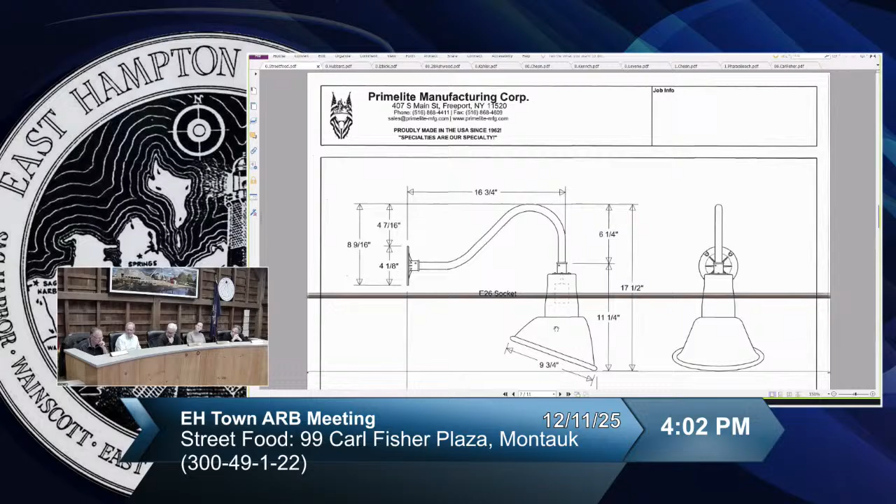She had a drawing. So that's the facade. Those are the gooseneck lights, shown upside down, but you get the idea. They're dark sky compliant, and they will go right over the sign, which is right over the central door.

Any discussion from the board? Can you show the photo again? So what's installed there is not what we're... No, these are new lights. Those are like little tiny spotlights. They sit outside in the summer. But this is actually to light the Street Food sign itself. Yeah, okay.

Good, no, I think it's good. And the others remain? And the others remain, yeah. Okay, I'd like to make a motion to approve this application as presented. May I have a second? Second. All in favor? Aye. Unanimously passed.

Moving on to change to commercial. This is Naturally Good, Suffolk County Tax Map number 300-49-4-12, at 38 South Etna Avenue in Montauk. This is not the Naturally Good store and restaurant on Main Street. This is the original Naturally Good property, which is on South Etna, closer to the waterfront in downtown Montauk.

The area in question here is a second floor. We're being asked to approve work that's already been done to change, as you can see, the lines in the stucco there. That was originally a covered porch, and they've enclosed it and added windows to 3 sides of the end of the second floor. It's barely visible, as you can see, behind the vegetation, and you're sort of peeping through, but there you can see the gable end view and a little bit of the other side facing the neighbor.

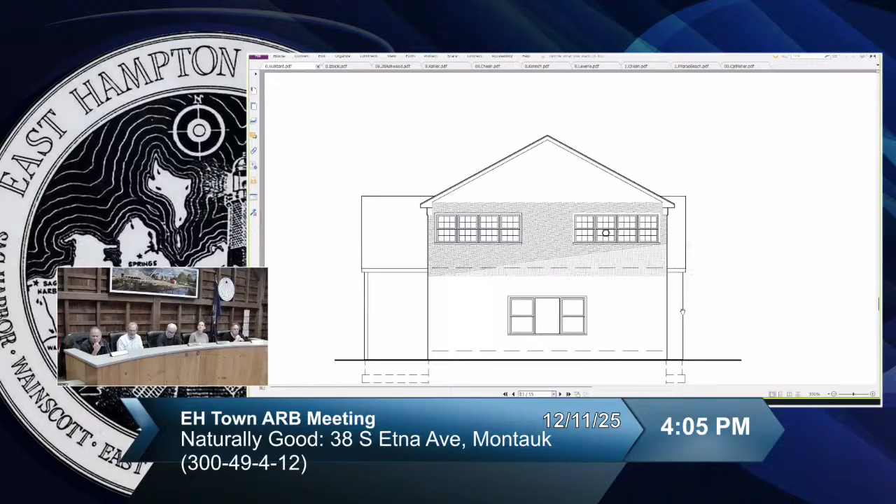But yes, I think this was done years and years ago. I looked at the original plans. We found them. This was a Tom Missing, I believe, or Frank Hollenbeck plan from the 90s. I think it always had planning board approval, or it was on the planning board's final approval, I think in November of this month. So they were just kind of going through and cleaning up all the things, and this arose. But the birds in the picture are not part of the application.

They just happen to like it there. And this is, I think it's a sushi store on the first floor now.

The hatch on the drawings is just indicating the area of work. I didn't see that there was any issue, because the stucco matches what was already there.

I don't think it was ever like a screen porch as you'd think. It was the second floor. I don't even remember it being different. I don't remember it being anything other than what it is right now. And I do know the chicken teriyaki is the only one my kids love from the downstairs place, although the street food's good too.

It's a little different than the plans because those are 6/6 windows and we have 1/1 windows now. So do we need to recognize this as built? Chris, we should mention that.

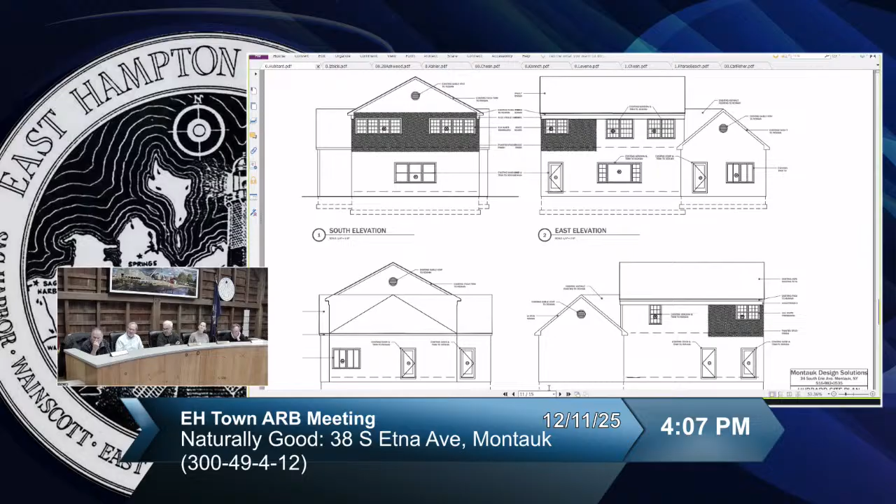Can we go back to the photos of the existing? Because I think the existing other windows, besides these ones and the other photos you can see in the overview, I don't think any of the windows have divided lights.

That was probably plastic grids that snapped in. Yeah, they just snap-in grills that were used, and they're taken out. So we're looking to approve a 1/1 light pattern.

As an as-built condition. Comments? Frank? No objection. Peter? I think we're good.

I'd like to make a motion to approve this application as presented. May I have a second? Second. All in favor? Aye. Passes unanimously. Thanks, Sandy.

Third item of the evening, still under change to commercial. This is Driftwood Apartments, Units 62 and 63, Suffolk County Tax Map number 300-110-1-13, at 2178 Montauk Highway in Amagansett. Chris, this is also yours.

This is a property in Napeague, just before you get to Hither Hills State Park, overlooking the dunes. It sort of makes you think of stopping at Howard Johnson's for a drink on your way out on the weekend. It's that kind of era.

This property is beautifully maintained, but it looks like people are starting to take single units—and in this case want to take 2 single units and combine them. Under each gable in this photo, you see that's basically 2 units, so each door represents 1 unit.

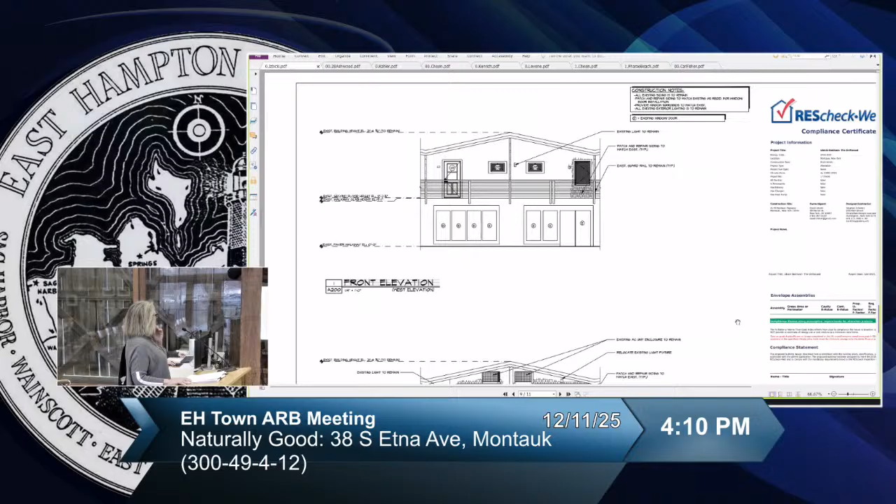There we go. So that's the change to the window, taking the door out. And on the other side you've got the sliders. Those are existing HVAC units up above, encased with a kind of lattice work.

I believe there was a different elevation that showed the lights moved as well. No new lighting—they're moving one existing light. One stays where it is, and the other existing light is being moved.

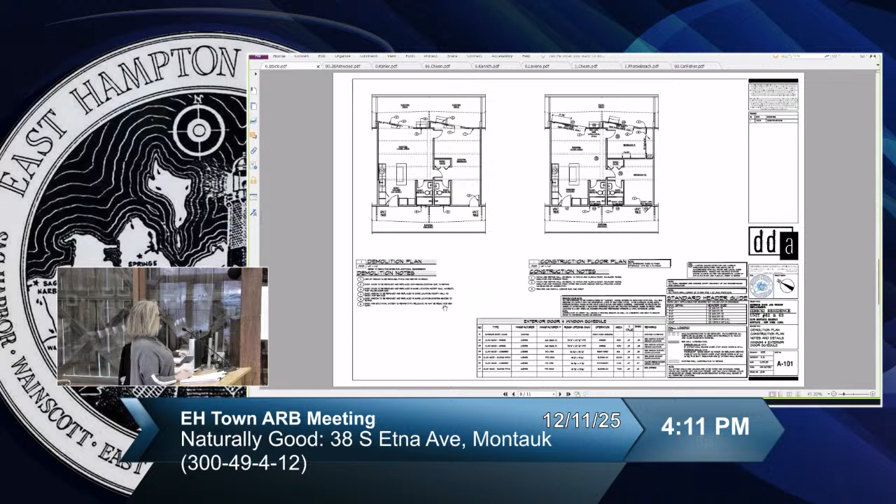It's very minor—there are little cylindrical lights that are pretty discreet. Yeah, there you can see it.

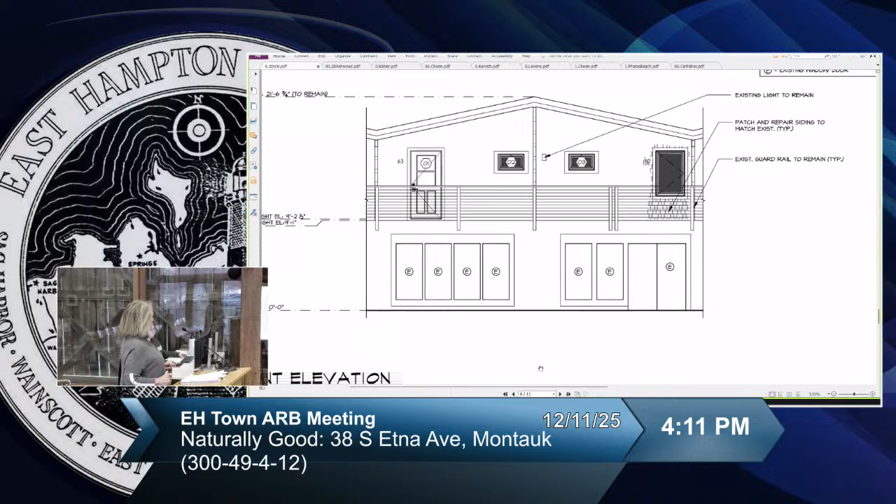So this faces the ocean? This faces actually east and west. The west facade faces the swimming pool, tennis court, and lawn area on the interior of the property, and the sliders face east, overlooking the last property before Hither Hills State Park. So these sliders and deck just look over pristine dune, perpendicular to the highway. Exactly.

You really don't see it from any public vantage point. This whole area, the driveways are so long, you can go by at 55 miles an hour on that big stretch and not even notice there's any development there at all. It's very discreet.

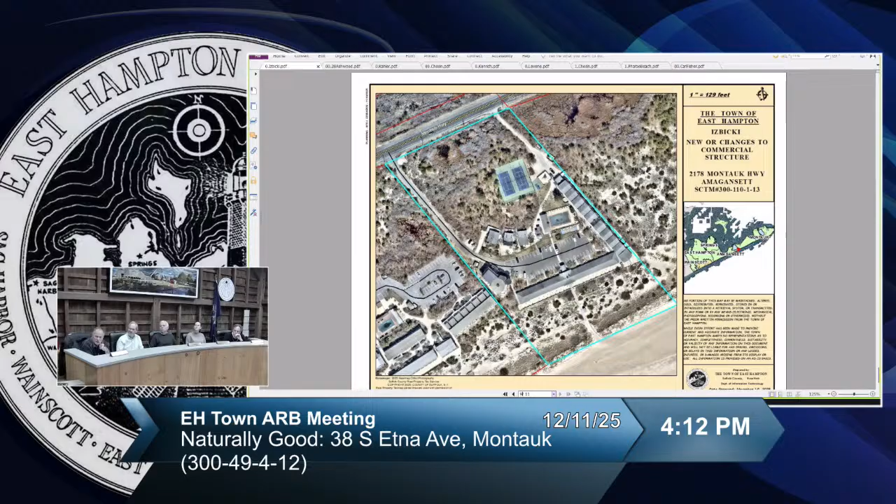So we're talking about basically something that other residents would see, and in that respect really only the change from the door to the window, which is behind the railings, up on the second floor, set back. It's very modest, I have no objection. I don't think we're looking at anything controversial here.

Are you good? Yeah. Peter, you're good? Fine, I think we're all good. Well then, I'd like to make a motion to approve the application as presented. I'll second it. All in favor? Aye. Aye. Frank? Aye. No opposed, unanimously passed. Thank you.

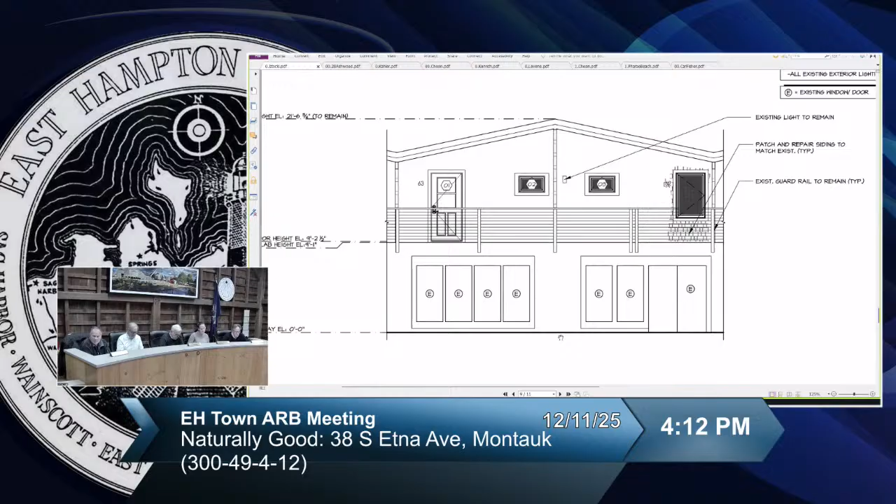Moving on to fences, walls, gates, and berms. This is Suffolk County Tax Map number 300-150-10-12, 28 Ashwood Court, Amagansett. Clara, this is yours. Thank you.

This application is before us today for approval of the existing driveway gate and fence. This property is set well back from Ashwood Court and is only partially visible from the two neighboring properties. The driveway gate is constructed from AZEK or similar material, painted white. The gate features white slats spaced to maintain 50% opacity, and it sits slightly on an angle, which we'll see in another picture. The gate itself is 6 feet tall, with columns measuring 6 feet 8 inches on the left and 7 feet 3 inches on the right.

Do we have anybody here to speak? Yes, on behalf of it, Nicholas Kortsidas for the applicant. Good afternoon, all. I don't know if you have anything to add to the application, or did I miss anything? No, I think you did a phenomenal job.

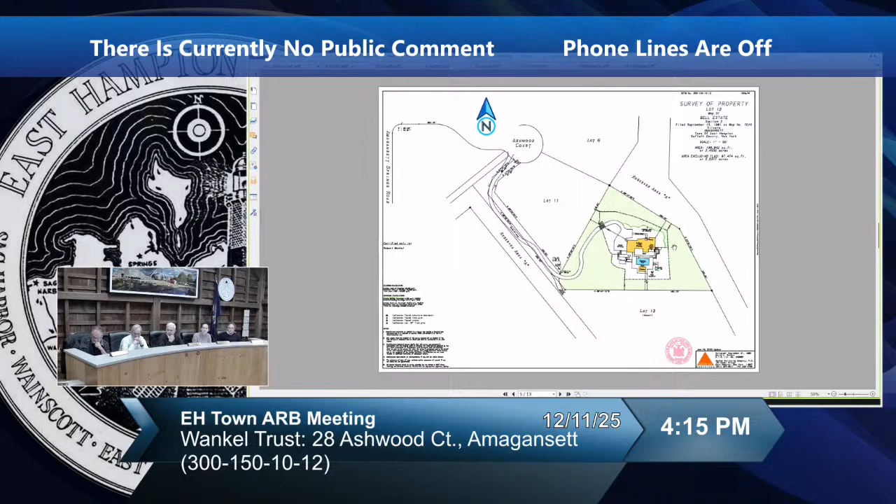Can we bring up this survey, and rotate it? So it seems to me, looking at the property line to the left of the driveway on the flag, part of it says 390 feet — so as the crow flies, this is like 200 feet from the pavement of Ashwood Court, right? Right, Ashwood Court. So my question is, why is this in front of us — because it's over 6 feet high.

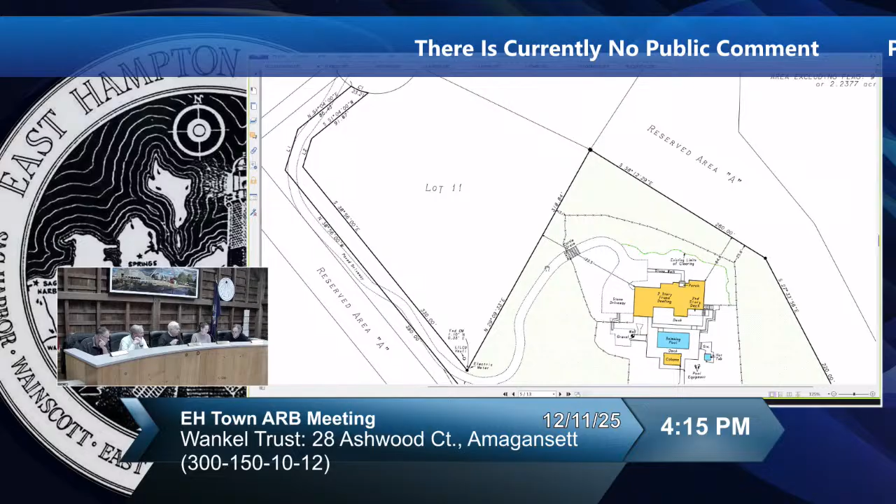Why is this in front of us? Because it's over 6 feet high. Yeah, oh, it's over 6 feet high — the posts are too high. So if you brought it into conformance at 6 feet, you wouldn't need ARB approval. Correct, and my client was trying to avoid that, so he said, see what you could do at the ARB.

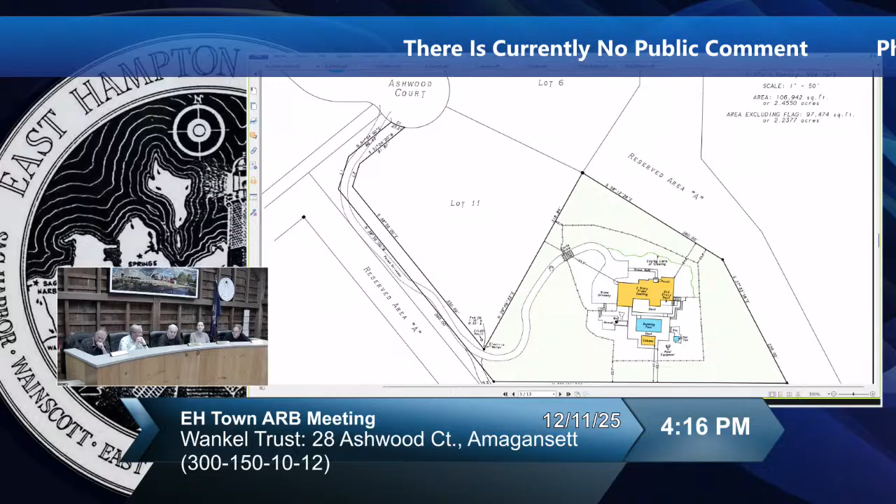And this is a legal question, but I believe there are only extraordinary circumstances in which we can approve a gate over 6 feet, correct? Correct, and the gate is not the issue — I think it's the post. That one post, right?

So can we see that again, the uneven posts? Nick, why are the posts so uneven? I think topographically it's a little challenged at the mouth of the gate, so one side is a little lower than the other, and hence they had to adjust one side of the post for the height of the other side. It also looks like the fence on the right is probably coming in from a higher grade, and they wanted to keep it level. That's correct.

So just architecturally, it would look pretty awful to have it — you'd have to have a stepped fence or something to get down to that level. Claire, what's your thoughts on it?

As I mentioned before, you really can't see the gate unless you're entering the property, but I don't know what was the purpose of the gate being over 6 feet in height. The column on the right is over 7 feet. I feel like it's unnecessary. Could that be cut down to match the other column? It might even look better.

It looks like they've got fencing for that, but that doesn't go far, I don't know if I have another picture there. No, not really, it's just a little bit, like one panel. It's similar condition on the right side, and after that is the chain link that continues.

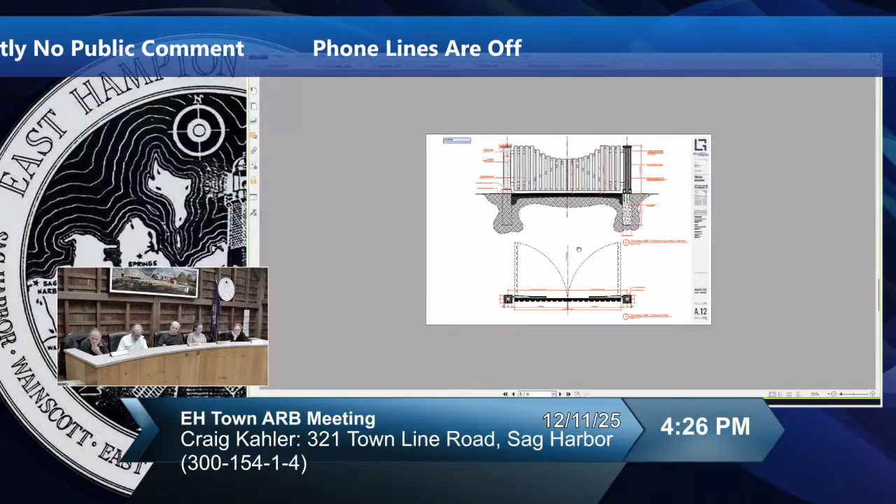It's not hidden in any way. The issue with this gate is more partly its design. It is designed to be 6 feet on either end, dropping to 4 feet in the middle, less than 50% transparent. There's 6-inch wide clear cedar wood boards being used with only 2 3/4-inch gaps in between. The columns will be 6 feet high, roughly 11-inch square, steel columns with painted AZEK to match the house as trim. So it's quite a statement. It's not incorporated with deer fencing or anything, it's just standalone to keep people from driving up the driveway.

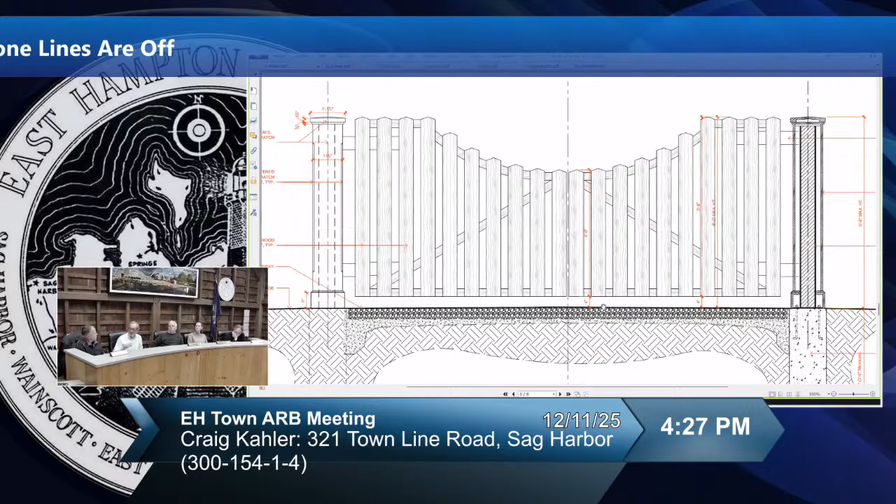The other thing I noticed is there are no other gates in the neighborhood. This would be the first and a prominent one. So I don't know if you want to add, Sir, you want to introduce yourself? Yeah, I'm Diego.

I'm the GC on the project, the contractor. We can go back to the picture you had before, the one with the design of the gate, the one that showed the location of it.

If you notice a little bit behind the red dot that you have there, or the tape, those stakes that you see on the right and maybe on the left, that's the 50 feet we're supposed to stay from the setback that you require.

And when we try to plan for that gate to be on that spot, we realized that because of the steepness of the road, we were going to hit the road. So we tried calculating using those hinges that lift about 8 inches, but sometimes they lift and open and we still hit it. We would have to narrow the gates, and that's not a good idea because of the fire trucks.

So we're just asking to be 35 feet away from the property line, just so our gate clears, because the road goes up straight, as anyone who was there could notice.

And the reason people drive on their driveway instead of the actual road from the town is because it's unpaved, the one next to their property. So sometimes people are just wandering around and get wrongfully onto their driveway. This was asphalted last summer, so all of a sudden you have a new road there, and people just go in.

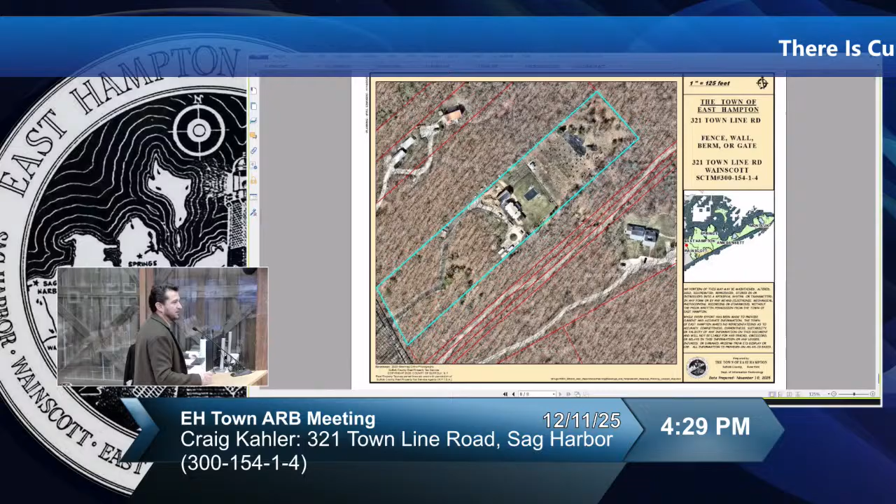It's an impressive neighborhood. It's safe walking, and I saw many people out yesterday morning with dogs all the time.

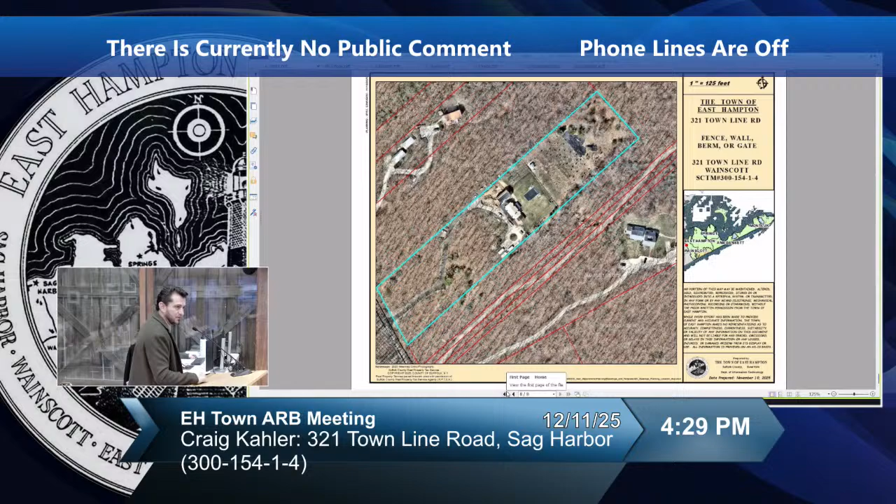More foot traffic. So from what you're telling us, the point of the gate is to signify that it's a private road, private property, but also the gate needs clearance to open freely. I guess the question is, why can't that be accomplished 100 feet back with a 4-foot gate?

That goes all the way. It's like, yeah, but if you see it, it's uphill somewhat down. I guess my objection, or I have several objections to it. Let me explain, I don't want to go too far in it, but in terms of how we judge a gate...

...is the design, the location of it, how close it is to the street, its material, its transparency, and its design. So for me, the biggest problem is the location of the gate.

It's not doing anything in terms of actually fencing in the property, it's just keeping people out. And there's no compelling argument why it needs to be so close to the street.

Or so high. Yeah, it's not for fencing purposes, because they fenced the back of the property. They did a re-veg, they bought the property with some issues there, and I think they went through with you guys, and re-vegged the entire back of the property, which is big, and fenced that just to protect it from deer eating what they just re-vegged, but they don't have any intentions of fencing anything other than the pool area.

So this is just to tell people that's the place, that's the house. If that's the case, then you could do a 4-foot tall gate and not be in front of the board at all. Well, yeah, the thing, yeah.

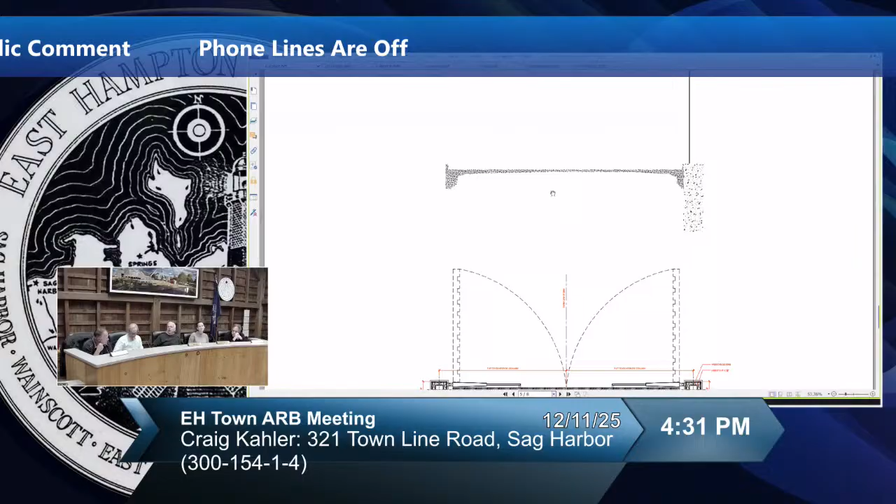Well, it has to be probably higher than what your drawing is showing, because of what you're saying, the grade of the road sweeping up behind it, which means that as it swings open, it's going to hit the asphalt.

So what you've drawn here is probably only a few inches clear. It's probably not enough - it's going to end up being 4, 5, or even 6 inches above grade, and it still needs to be level enough from the 50-foot point that they can open it. The grade starts beyond there.

I guess my point would be, rather than face objections about design considerations and everything else, if you're able to convince your clients to keep cars out with a 4-foot gate, you wouldn't even have to come back to us - you could just apply for a building permit for that. Well, the building department sent me your way because they said I needed your blessing since they missed adding that gate into the permit.

You do need it because it's higher than 4 feet. If it's not higher than 4 feet, you don't come before the ARB. And how about the setbacks? Doesn't matter - a 4-foot gate can be anywhere within the property, even closer. But I would have to revisit that with the clients, because we already lowered the design, the height of it, at our request with the architect, just to see if we could do it.

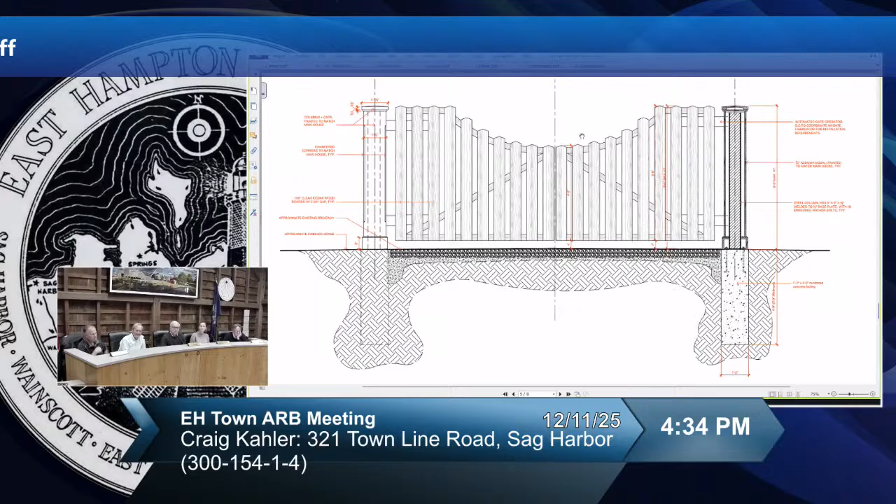Can I say something in my defense? Absolutely - this is nothing personal toward you. I could have just come in with a fence only 3 feet shorter than the one you just approved as work done, but I came to try to do it the best possible way. What I'm asking for isn't that crazy of a request.

But there's no need for the gate because you're not keeping anyone in or out, like deer or grandchildren, the usual reasons we get - you're just trying to keep cars out. So I would urge your client to think about that.

We know the client because they've been before us before - yeah, they're nice. It's a beautiful property, but beautiful properties don't need to be gated off so no one can see them. It's just, I guess, for their peace of mind about the kids not being run over by someone.

That's completely understandable, but cars will be kept out very effectively by a 4-foot gate, or even a 3-foot gate if you wanted, whatever height you wanted. Anything up to 4 feet does not come before the ARB at all, so you wouldn't have to come back to us - you could go straight to the building department.

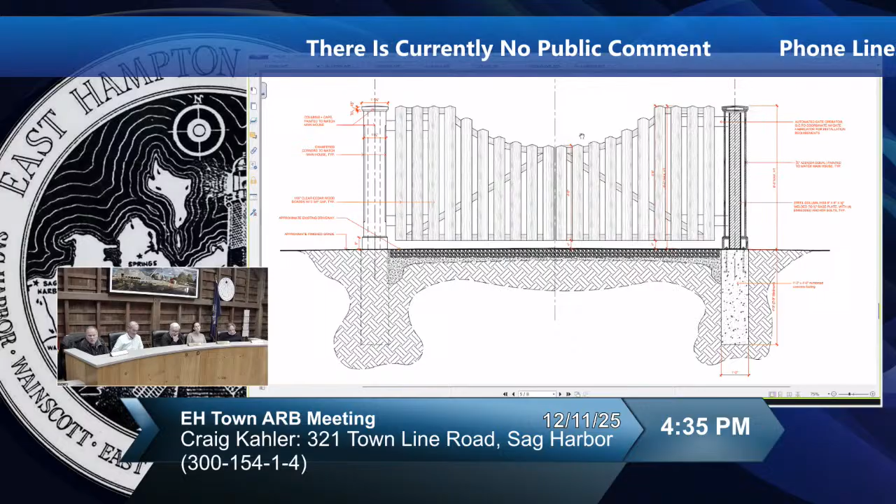Would you consider a more transparent gate? What, like 50% transparency? Yeah, 50% is our usual standard - so you can see, you can't see, you can see, you can't. That's the architect's design, because that's what they have inside the house, repetition design and all that.

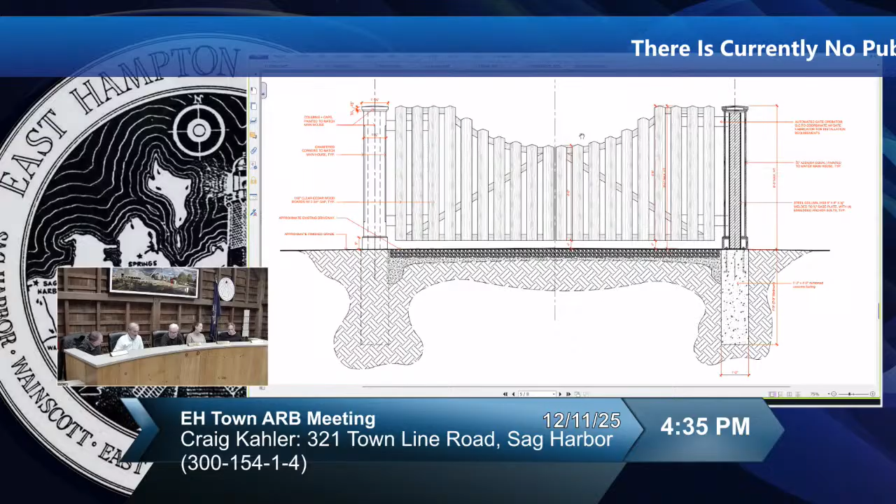But if that's the case, would you consider it so we can come back and talk to you about it? Not at the back site, but here with a more transparent gate in its current location. Yeah, we want to just keep the location, and we can give on the gate height, but nowhere else.

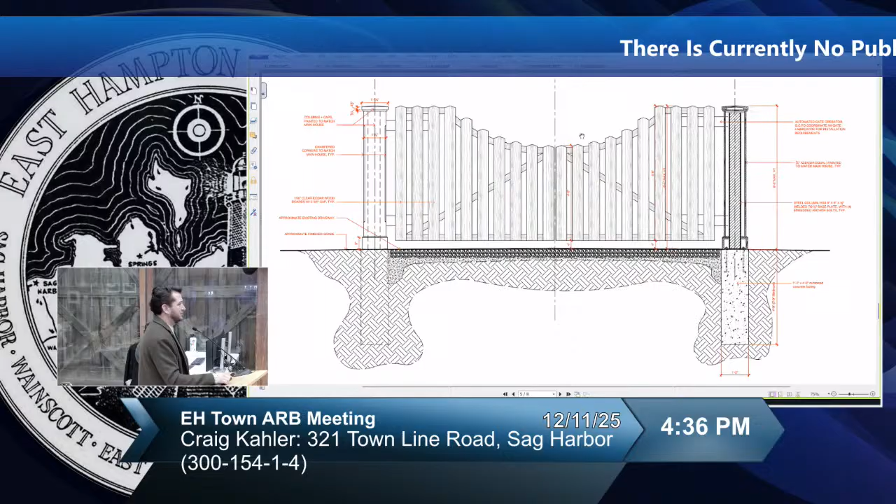I would urge you to think about an alternative, whether it's a 4-foot gate or 50% transparency gate. At 4 feet it can be solid, but anything over 4 feet, we're going to tell you it has to be 50% transparent. Okay, I can work with that. Thank you very much.

Next item, still under fences, gates, walls, and berms. This is 694 Hands Creek Road, Suffolk County Tax Map Number 300-74-3-4. This application has been postponed until January 8th. So item 6 has been postponed.

Moving on to item 7. This is 12 Greentree Court, Suffolk County Tax Map Number 300-126-1-14.24, in Amagansett. Frank, this is yours. This is an application for modifications to a resolution for a gate, which we've already approved.

So we had approved the gate, it came back for a CO inspection, and there were lights added to the gate. So that's the modification before the board today, and then we have a CO inspection. Really that's all we're considering. There's a dark sky compliant light on either side already installed. That's my understanding. If you'd like to introduce yourself and add to that.

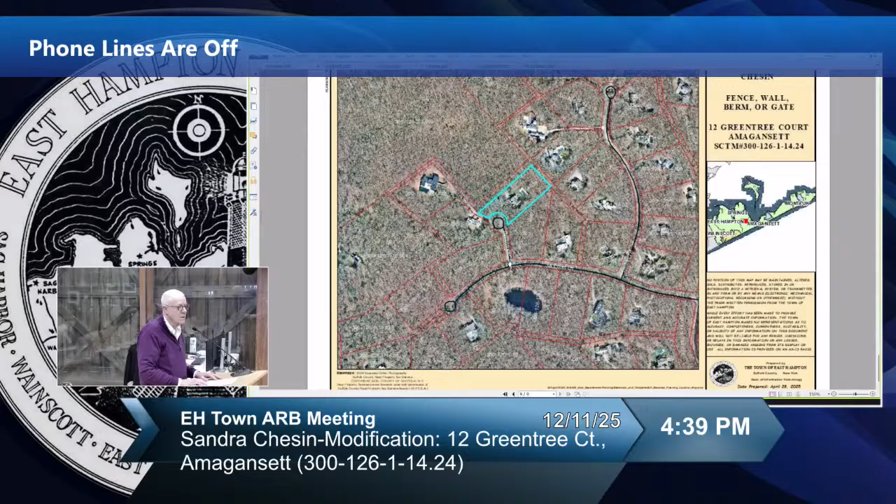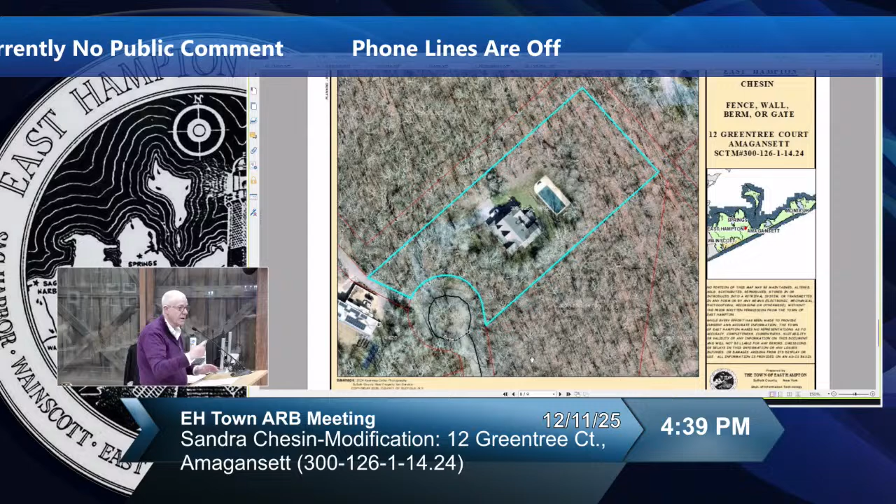Happens all the time. To give the board a little context, this is on a court up in Amagansett off of Old Stone Highway. You drive there by getting to La Forette, and then you drive down. There's very little public traffic that goes down there. Also, the court where the driveway starts is higher than the gate, so you're slowly driving down to it. There's actually no public traffic - it's a tiny cul-de-sac with two other homes, and one's a flag lot in the back. Nothing comes through there unless they're delivering to the house or it's my one or two neighbors.

I'd like to make a motion to approve the modification as presented. Second, all in favor? Aye. So passed. Thank you. Let's do your C of O while we're here too.

I'm also on here, I just noticed, for a little bit later with CO. So we're going to do it now to make it easier for everybody. The CO inspection means we go back to the site if it's not yet been built when we approve it, to make sure that what has been built conforms to the resolution that's been approved. Clearly it has, because we've just approved what's been built.

I'll only note to the board that there is a bit of a builder's tolerance in terms of the height on this one, regarding the columns. We had approved 6-foot columns; they are a little bit higher. That looks like pretty good builder's tolerance there - that's close enough.

I didn't go out with a tape measure, but I know they were supposed to be built to spec the way you approved it, to the best of my knowledge. Who was the builder? It was East Hampton Fencing Gate. It doesn't match the drawings exactly in that respect, but in this case, simply because of its location relative to the street being down, I'm willing to go with it. Yeah, it's a very tasteful gate and the lights and everything.

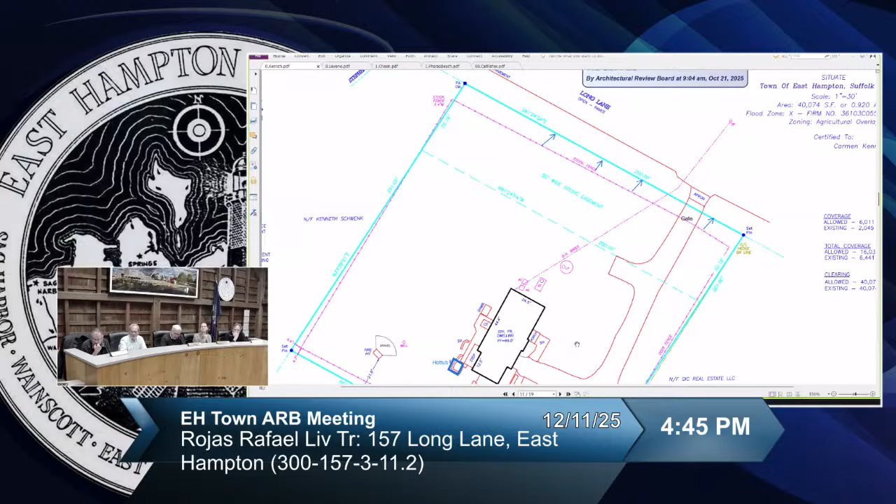That's it, right? Okay, so all of these improvements seem okay to me as long as they respect the setback requirements. The only issue I have relates to a 50-foot scenic and conservation easement which parallels Long Lane, granted in 1975 by the applicant's parents. That easement stipulates that no buildings or structures of any type be built in the easement, excepting a driveway. So the stockade fencing we looked at, soon to be an 8-foot deer fencing, and the chain link driveway gate need to be removed from the easement and properly installed 50 feet back from the property line.

I don't have a problem with the chain link gate per se. It is very transparent, but I'd like to hear what the rest of the board thinks about that. The current 8-foot high deer fencing on the sides of the property wanders a little bit off the property into the neighbor's property on the back left corner and the front right corner, and they're going to need to be moved onto the property itself.

Carmen, would you like to fill in anything I missed? Sure. Just to clarify, when we say neighbors, it's corn this year. Maybe next year will be potatoes. It depends on the farmer.

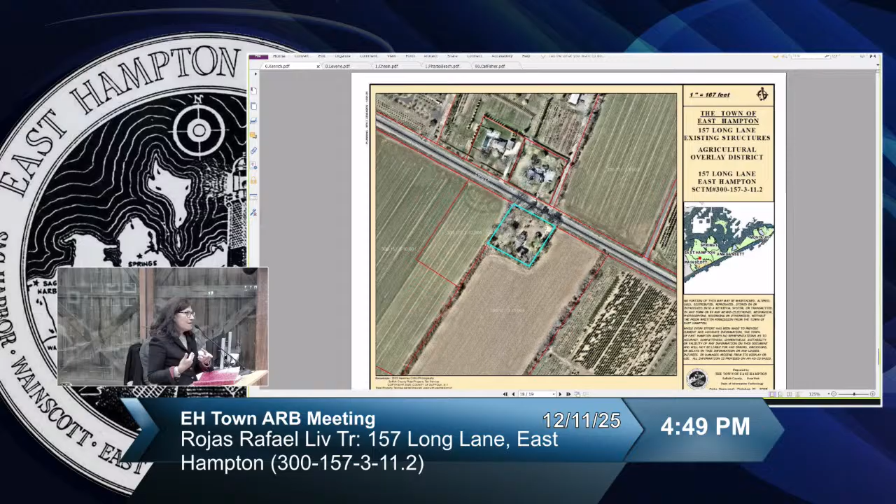What we're realizing is that the stockade fence is falling apart, it's really old, so we can remove it. But what we're asking now is what can we do so we're not putting it in 50 feet, creating more space where deer will literally just be hanging out there. I'm trying to think about common sense, what's the most reasonable thing - is it that we put the deer fence on the property line?

No, you're not understanding - I don't think you're listening to him. The easement is a legal document. You can't put anything in there. You cannot put it - you can have nothing there.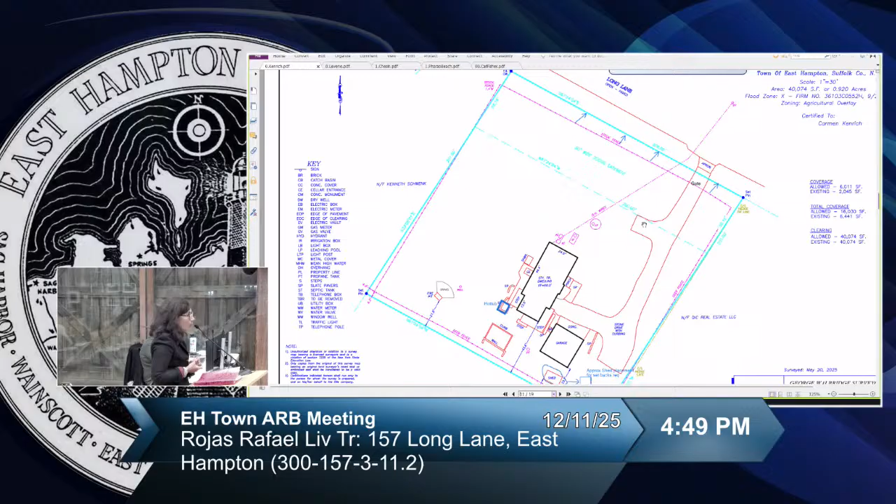So here's the map - Long Lane is the top left. See that parking space? That's roughly where 50 feet is. I understand you have to move your deer fence there, you have to move your gate there. A deer fence is relatively transparent, but once your parents signed this, there can be no structures of any kind in the easement.

So this is the border, this is the property line right here, right? Yes. So couldn't you put the deer fence right there? No, you can't - that's the whole area. Structure means literally nothing but a driveway. There's the right of way that the town owns, and then there's a 50-foot scenic and conservation easement. You have to be behind all of that.

And it's not something we negotiate because of the farms or the deer or anything - it's a binding legal document that your parents signed. We've gotten into situations where things were built in scenic easements and they get ripped out immediately. So I can't stress how important it is that you respect the 50-foot easement. Could you put plants, hedges? Yes, you can plant, but you can't put anything man-made, a structure.

Okay, so maybe that's my mistake - I read that outside of the easement, on the property line, you could put a deer fence, not a stockade. Anything from the line of the easement to the street, you can't put anything - that's the town right of way. The easement is supposed to be a natural, beautifying aspect, so driving down Long Lane you're not bumping into fences on the left or the right.

So the whole point was to preserve the open land, not to have you fence it in because of all the situations you've described. I mean, it's a large property, it's an acre property, you're losing 50 feet of your front yard, but a deer fence would be transparent.

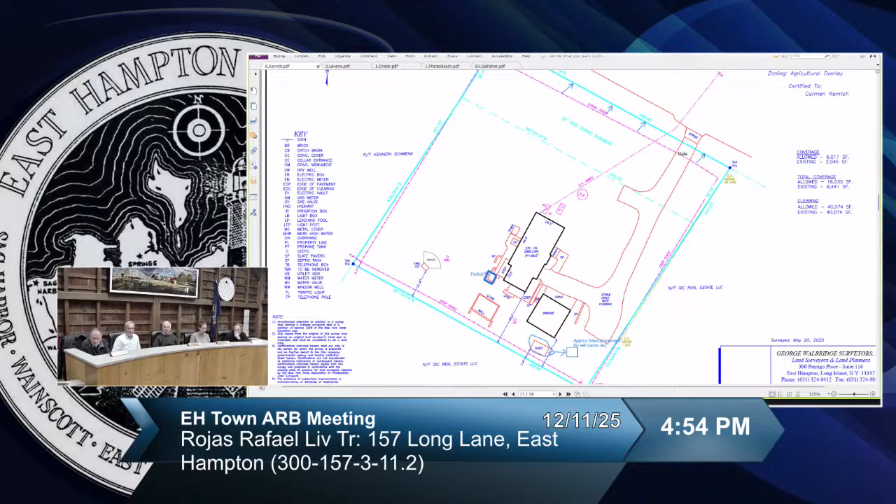Okay, so what are those things? There's the hot tub, there's... you want to go through them again real quick so we all understand what we're talking about? Any objection to the other stuff?

The open shower, it's adjacent to the house. Fine. Those are the air conditioning units, standard practice. That's the chain link gate currently.

That's the stockade fence along Long Lane. That's the cascading steps off the addition.

That's the shed, which has been moved to a more suitable spot. That's the site of the future hot tub. That's the fire pit that's in the far back of the property.

Just to let you know in terms of what comes with the property you've inherited: because of how it lies in the agricultural reserve or ag overlay, it's very special that basically anything you build in there, any modification has to come before us.

For example, if you weren't here earlier, we suggested that somebody who wanted to build a 4-foot fence wouldn't have to come before us since they're not in the ag overlay zone. But here, even a 4-foot fence would have to. I've learned a lot from your fabulous colleague right here, so it's been a learning experience.

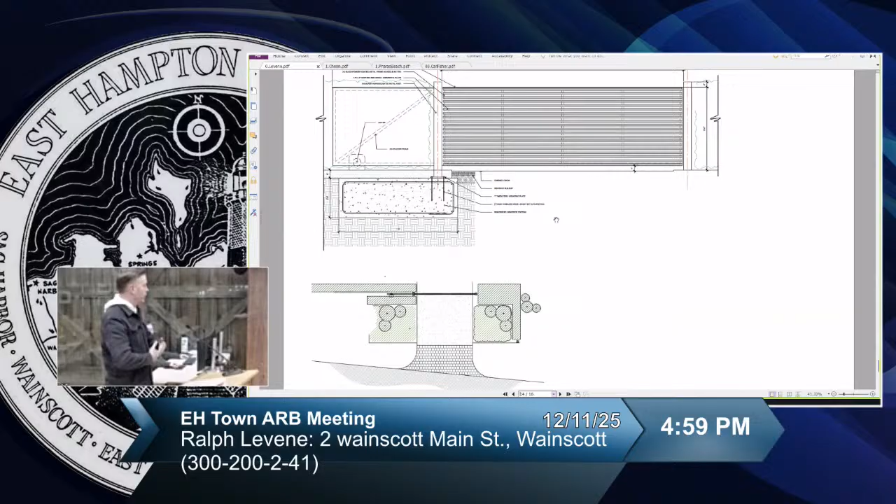As you mentioned, space constrained. It's the only way - if we had a swing gate, we'd be into the driveway, and that would start to compromise some of the parking spaces and functionality there. Would you introduce yourself? Sure, Ian Hambeck, THLA for the applicant.

And what I noticed to the right, there was a whole - I don't know if we have all the pictures, I took a series. So you cut down some of those trees to accommodate the gate? Yeah, they're in pretty poor health, those Leyland cypress, as they tend to be as they get that size, so they won't be replaced.

And where are these relative from the street? I know you're not going to go out there and measure every one of them, but approximately, distance-wise relative to this one? They're 30 plus, all of them, but they have longer driveways - this one doesn't have 30 feet. This has 2 frontages, so it's a corner lot, and I think that constrains both the building location and also the access there.

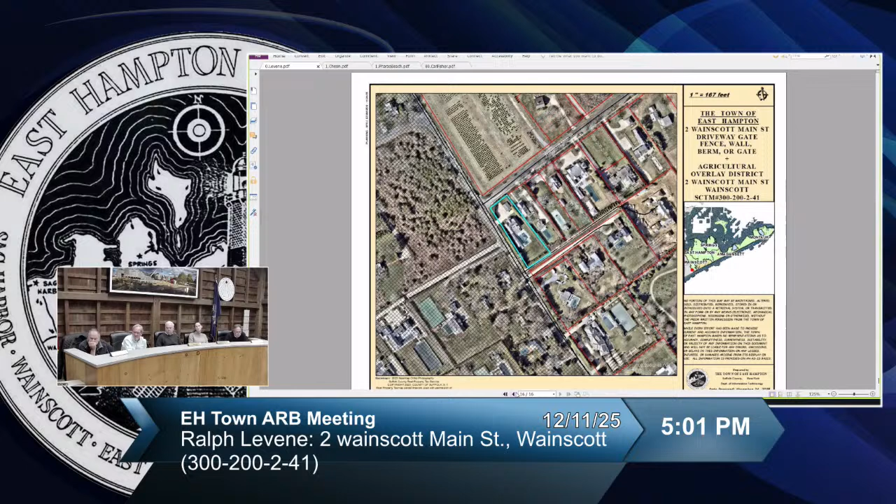Is it safe to say the town line properties are deeper? Yeah, I mean, this is elongated over Wainscott Main, right? And it's shorter on the town line. The depth is shorter along town line.

Right, and as you noted, the house is at roughly 20.8. So once you factor in the position of a gate and any circulation between the gate and the side yard of the house, we're netting out around that 20-foot number to maintain that circulation.

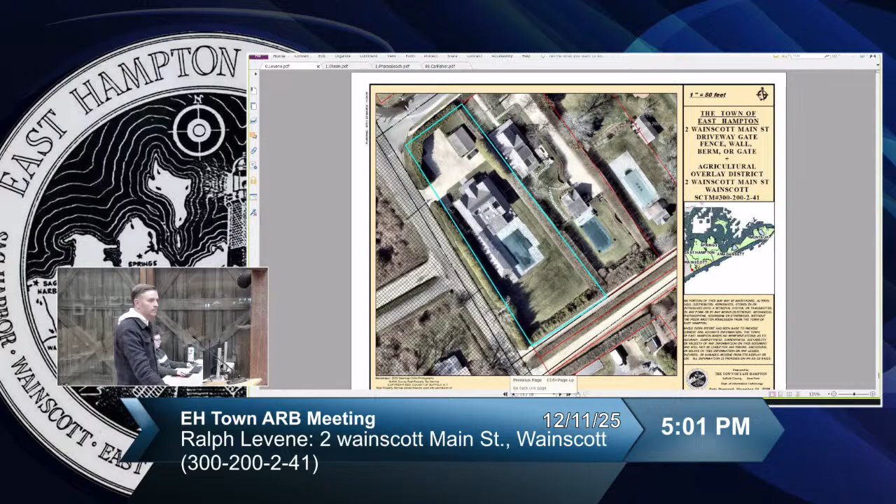So I was going to say, I'm guessing there's a fence, I'd see it on the survey, going from somewhere along the sides of the house to the property line, then it circles the back of the house. So it's not like you're fencing and finishing that corner at Main and Town Line, right?

Yeah, there's a line of sight issue, it's a busy intersection right there, and the survey says arborvitae, but they're Leyland cypress on that corner, where they have to be set back at a 45-degree angle. So we're not maxed out.

You can even see where the pavement goes over the property line. We're not maxed out to the extent of the property line. So we're somewhat governed by the size and scale of those pre-existing trees relative to the sidewalk and the street and some of those other pre-existing elements.

So it's really for privacy, right? Yeah, cars, when they're at that stop sign, you could have two or three cars stacked up on a busy summer day that are looking right in their front door.

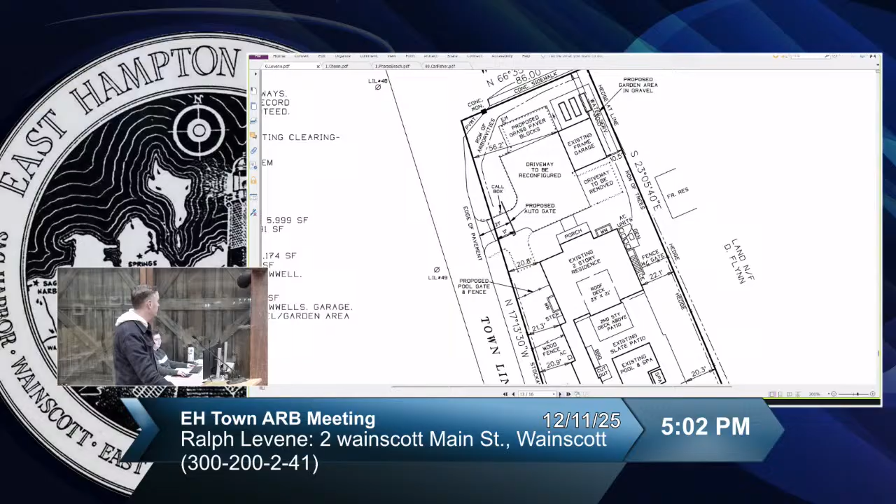Will, can you go to the plan sheet that shows the plan and elevation of the gate? So what's the height we're being asked to approve? 5'3" on the gate and an additional 4 inches for the post.

So what about the fire department requirement that a gate needs to be set back from the pavement? Is it 20 or 21 feet? It's just 20. Oh, you're just 20, okay. Just 20. And that's what it's specked.

This plan shows what looks like maybe the Leyland cypress being recreated, maybe in a different line on the right there? Correct, yeah. We need to create a little niche with hedging that the cantilever of the gate can slide into, so it remains hidden both from the inside and the outside.

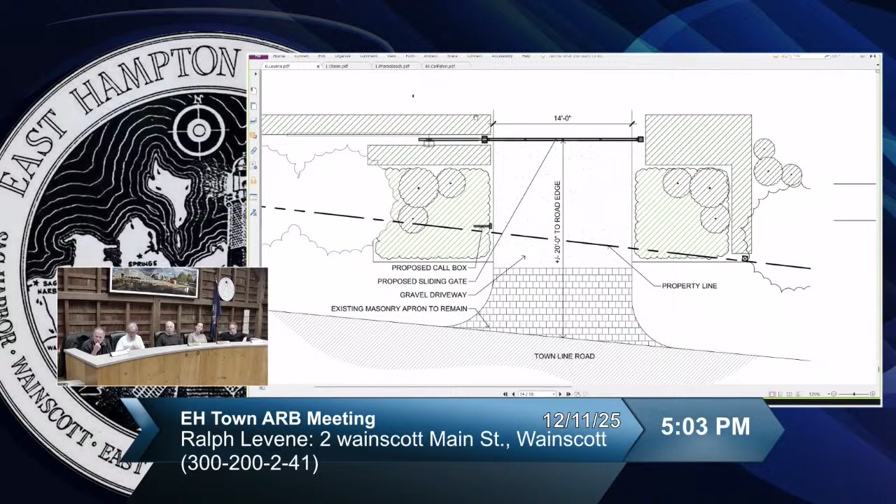So what that really will do is create a lower level of landscape that supports the gate before it steps back up to the hedge. We're trying to create an appropriate scale at that arrival moment as well. It also helps the visibility. It's a very tough lot, it's just pinched in every direction.

So it is 5'3", not 6'3"? No, 5'3" height. And some of that 5'3" too, I believe, is the 4 inches of snow gap at the bottom. I think the actual gate's like 4'11".

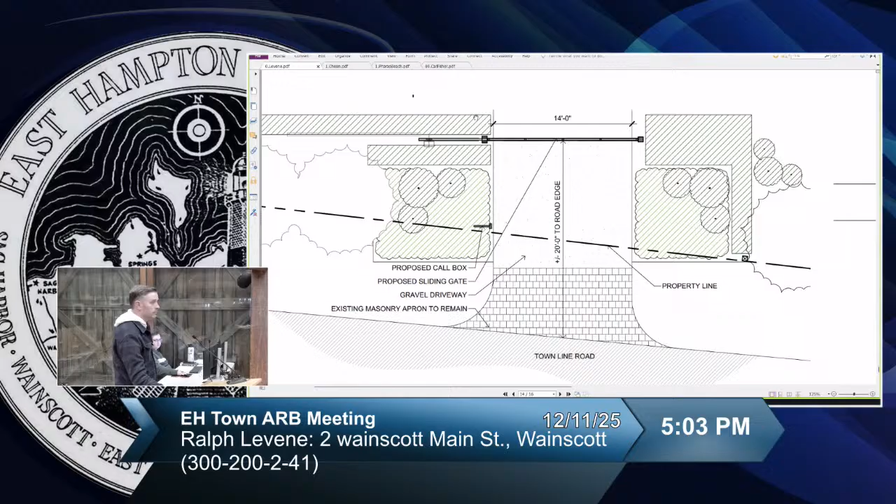So the context of this is a neighborhood that's full of gates because it's a busy road, Town Line Road's busy, people speed to the beach. So at first when we thought about it, we thought, what's going on? But the more we look at it, it seems to be contextual to the neighborhood.

Given the position of this property on that busy corner, I think it's merited to have a little protection there. And the slider is probably the best option. Yeah, once you do the swing, you lose, you're going to be in the turnaround space. I think also if this were on Main Street, more in the historic area, I'd feel differently about it, but.

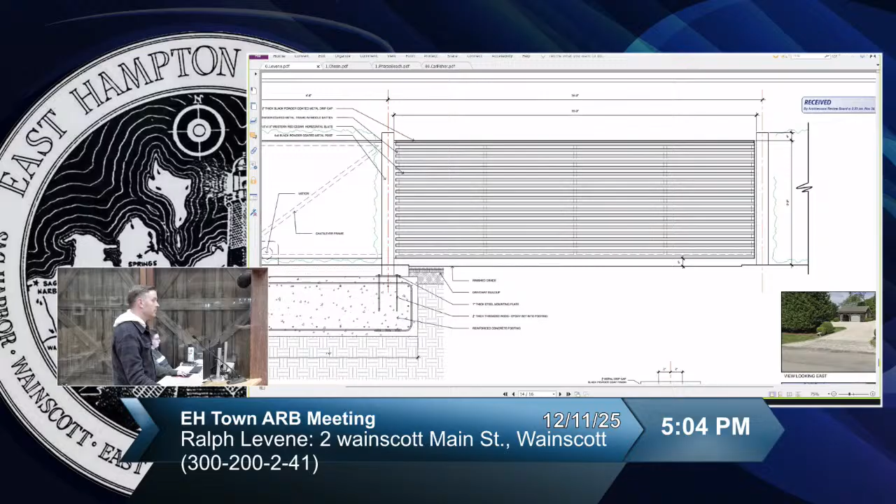Yeah, it's across the street from, again, I had photos, the Sagaponack side is just overgrown. It's actually on this drawing in the lower right-hand corner, there's a view looking to the east there. There's nothing across that's immediately for sale, though I think I saw for sale. It's a beautiful house over there, a highly coveted vacant lot in Sagaponack.

Okay, are we all clear? Yeah. Chris? Peter, problem with it? Good. Frank, you're good? Okay, I'm okay.

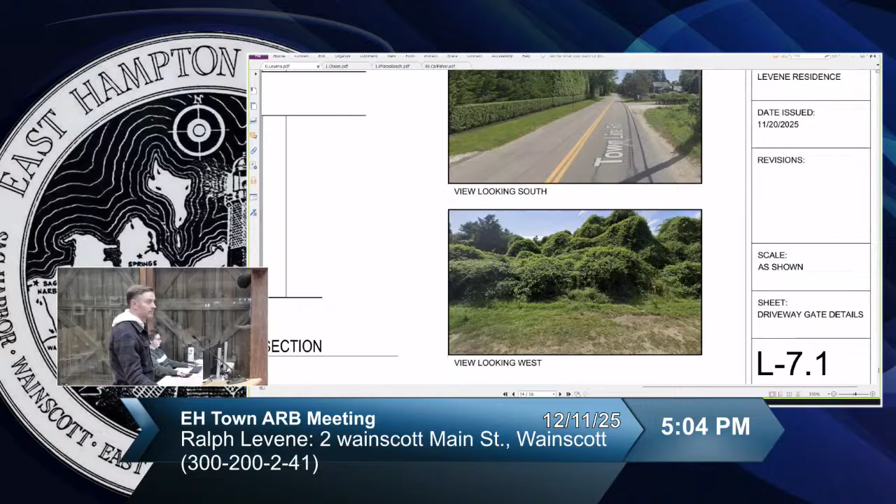And it's black, right? Yes, well, it's cedar, cedar clad slats. But gray or will it be stained black or just natural? Black powder coated frame. Oh, powder coated, but okay, it'll weather naturally.

Okay, so make a motion. I make a motion to approve this project as proposed. Second? Second. Frank, all in favor? Aye. Aye. Unanimously passed. Thank you very much.

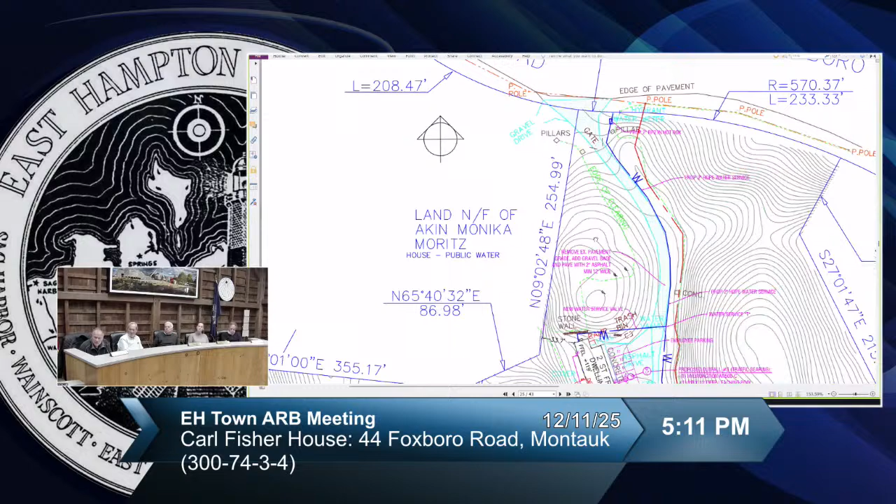We're looking at 11 parking spaces, some of which are down at the carriage house and others are shown clustered around the main house. We're looking at paving the driveway, which is currently paved and kind of patched, not in great shape.

We're looking at a configuration for an ADA ramp for accessibility to the interior. We're looking at some metal fire escape stairs coming off of a third floor window as a secondary means of egress from the third floor.

They're looking at a general project of restoring trim, siding, select windows, masonry work at the terrace paving areas. They're looking at insulating the structure, which includes taking off the shingles and adding an insulated sheathing board to everywhere except the gable ends, and then shingling over top of that.

So this does involve a change of use. It was a residential structure. It's now Carl Fisher House, town owned. It's host to exhibits, historic exhibits, and is also broken up into museum space, which is an assembly use, and also business use for administrative offices.

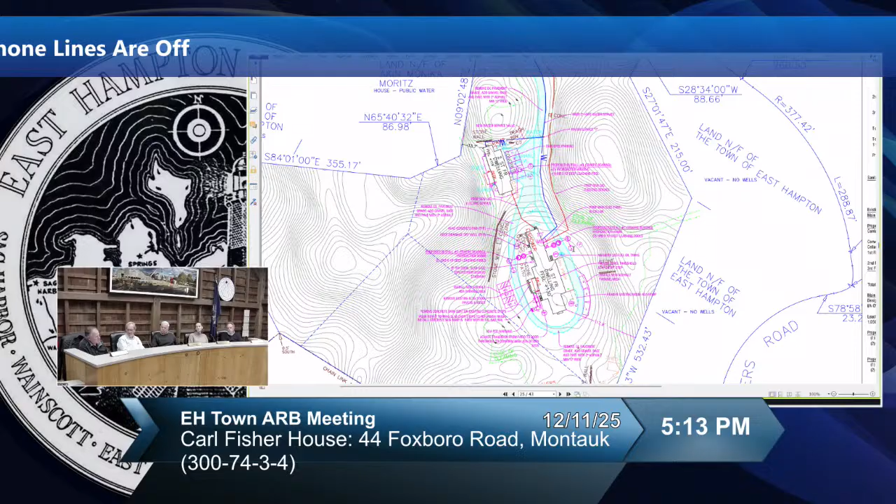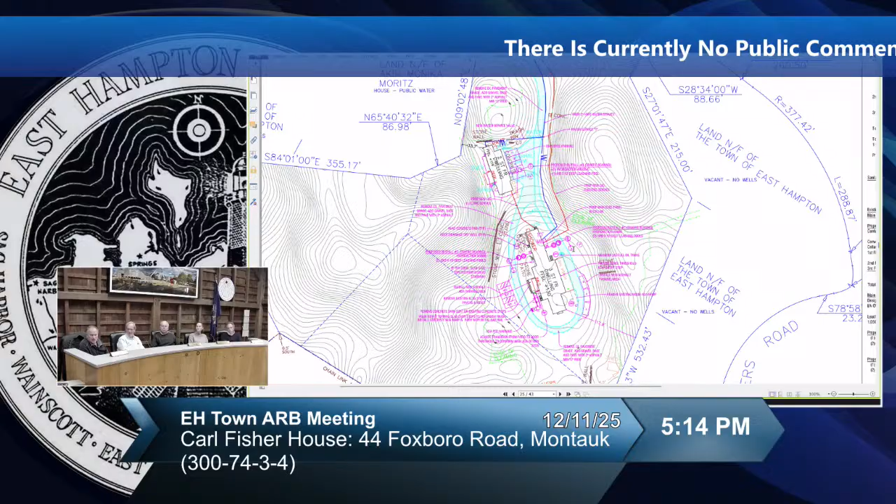So with a change of use, there's all sorts of review of the codes where you're taking a historic building and you're allowed to use the New York State existing building code, not just apply standards from the New York State building code for new buildings. It gives you some leeway in terms of how you can address things like accessibility, fire safety, egress, and other systems. So the application is pretty clear in what they're intending.

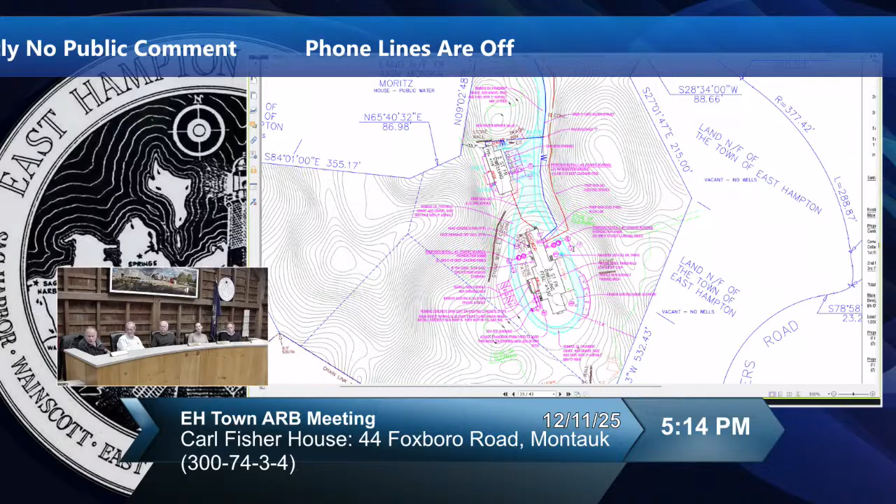If you want to zoom in on that a little bit, you can see first up at the carriage house, there's existing parking there. They're looking at doing asphalt with striped indicators of parking spaces there. A couple of them in front of the garage bays and a couple of them into what's been converted to residential space.

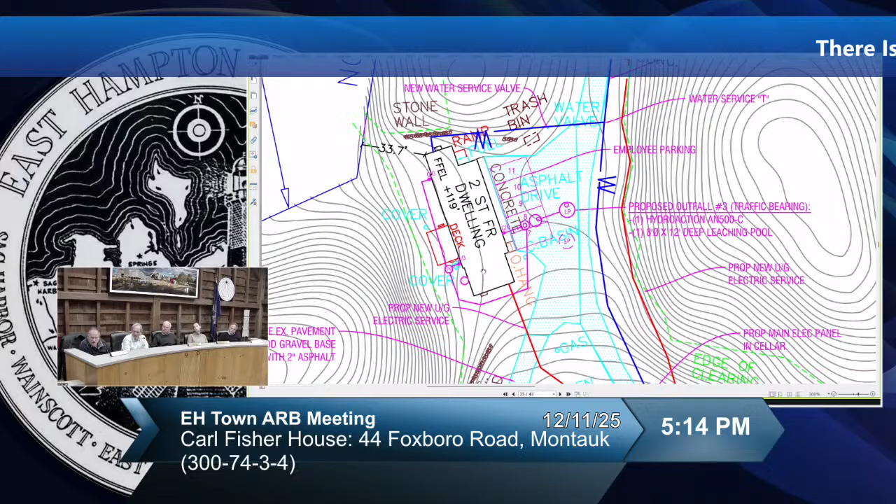And so the drive, there's also the deck would be rebuilt there, which is on the left-hand side of that. Again, new HVAC, plumbing, and electrical work involved there in that structure, as well as the exterior renovations and restorations and repair work. So then you go up the hill to the main house, which is the museum and admin offices as proposed.

The original driveway, which you see is a kind of dirt driveway in the very early shots from the 20s and soon thereafter, it's now paved. As I said, it's pretty bad shape. But on the right-hand side now, there's a fairly flat lawn that's surrounded by a split rail fence before the grade drops off.

That is now shown. Part of that would have the septic underground, and then they're also showing 3 parallel parking spaces pulled off of the driveway. That's the covered porch, the double height covered porch facing east, and then you continue to sweep around.

There's currently a wooden wheelchair ramp that heads up to that double height covered porch that they're proposing to remove.

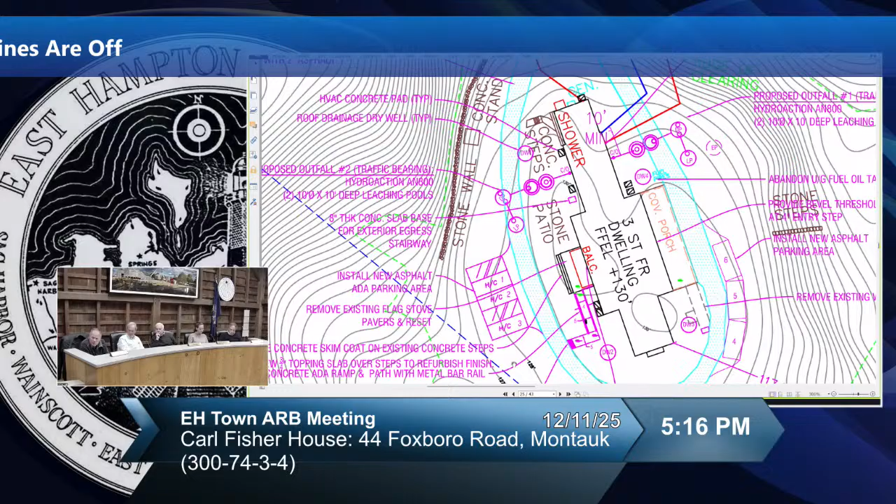Then as you sweep around the oval and you come around to the other side, they're proposing to add 3 accessible parking spaces and the striped loading areas, off of the driveway, just directly opposite the smaller porch facing west, and also replacing that existing wooden ADA ramp with a concrete accessible ramp and walkways with a stainless steel pipe railing going up to the back porch of the building.

Let's see, what else do you see here? You see a very small rectangle right in the nook there, right there where Will is indicating, which is a concrete pad, which is the landing pad for what's called out as a mill finish aluminum switchback staircase.

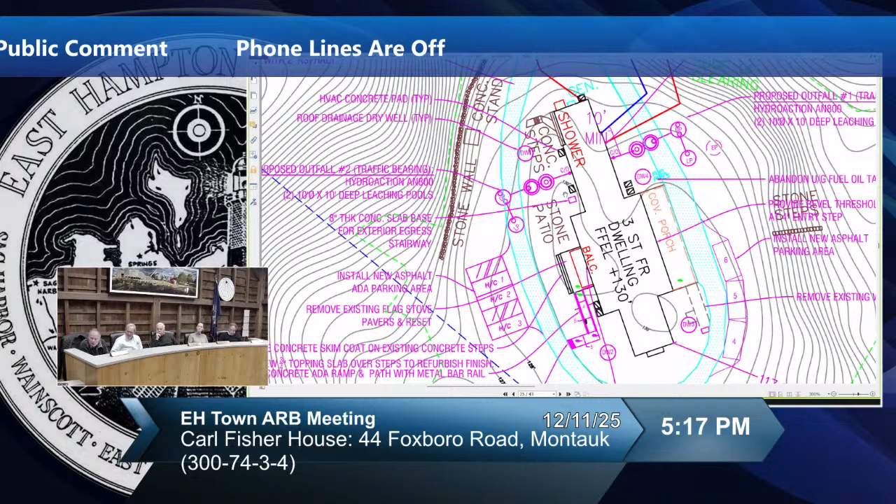What they want to do is take an existing 3rd floor window and replace it with a casement with the same light pattern to allow for emergency egress as a secondary means from the 3rd floor. You'd have to come down that staircase over part of the roof, and then you're out in the clear, and then you'd come through the switchback stair down to grade at that point. And you'll see that in the elevations.

There's a few little HVAC units that are shown in those little hatched boxes around in several different locations around the building. Let's see, I think that's it from the site plan side of things.

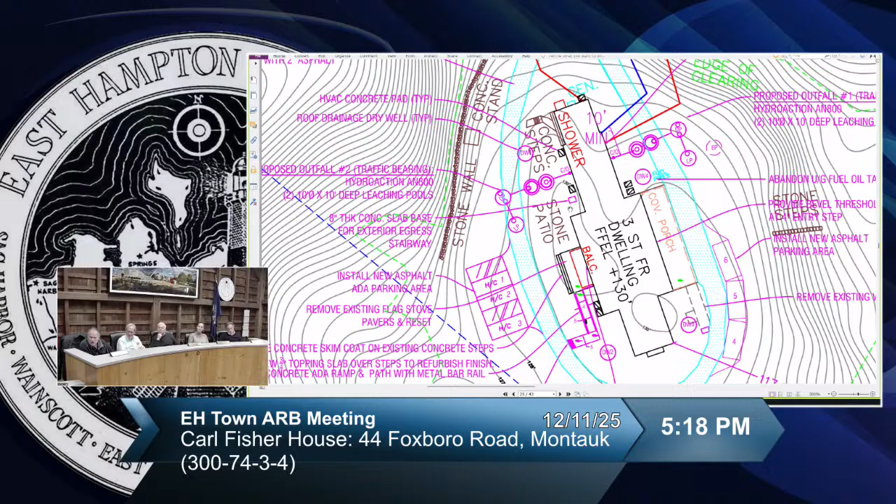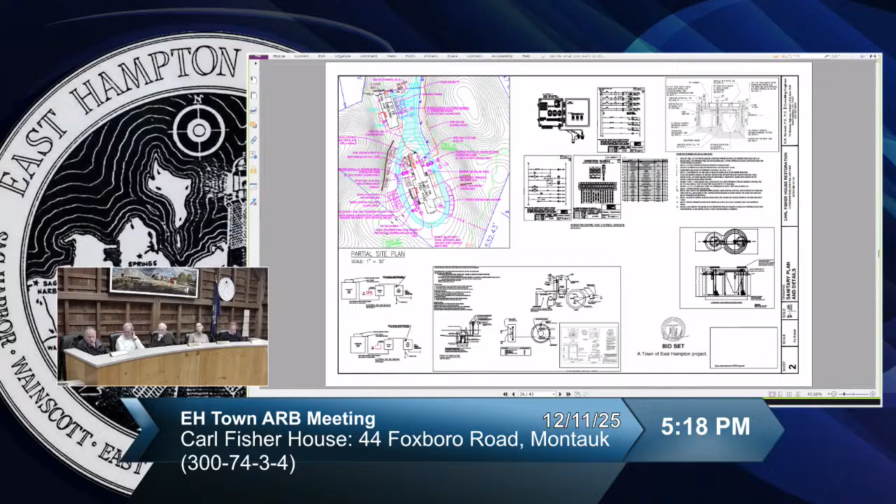Probably looking at the elevations is the best way to move forward with this. The first floor is designated as museum assembly space, which has one set of rules. The 2nd and 3rd floors are designated as business space, offices whether admin or commercial, considered a B use, which gives certain requirements for egress.

Most of the project, the imagery on the elevations doesn't change because they're not proposing changes to the actual design of the building. It's really all in the details.

The bumping out and adding insulation on the outside of the building allows for better insulation without harming the interior finishes, but on these faces, not the gable ends, where there's rake trim going up the gambrels, it's a challenge to make any change to the depth of the facade. Here you're actually losing 2 inches of the soffit overhang. The roof, eaves, cornice maintain the same, but you lose 2 inches of soffit overhang by bumping that out.

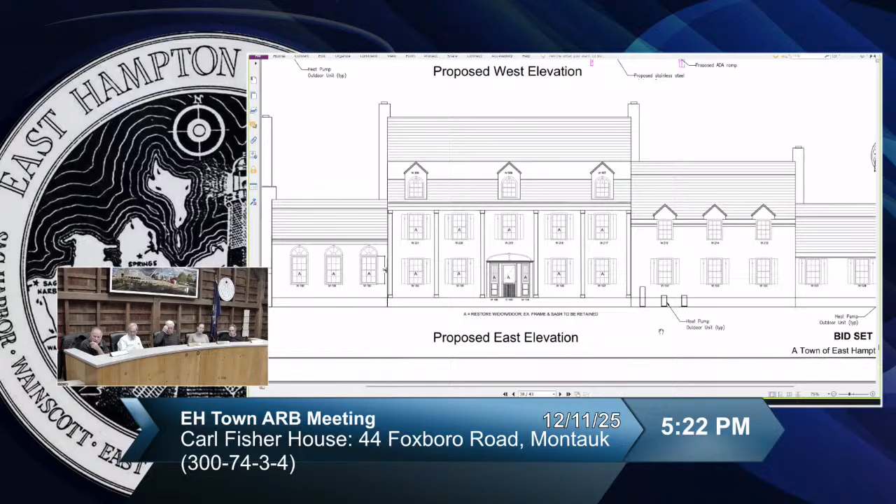There has been work done to the property, so one question would be what degree of historic documentation exists, in old photos or drawings, that would help us. For example, the cornice around that single-story porch on the right of the drawing looks like modern flat AZEK trim instead of any kind of profiled cornice. I don't know if that was original. It's hard to tell, but the capital on the double height columns is currently just a puny little trim piece that goes around there.

They've changed the nosing on the skirt board of those double height columns as well. That's modern. I don't know if it was just matched in kind. It's hard to tell. So in the effort of trying not to recreate things conjecturally, I'd be interested in finding out from the applicants what kind of documentation exists that would guide the restoration and renovation of the property.

Drew Bennett. No, Drew, do you want to come up and fill us in on anything?

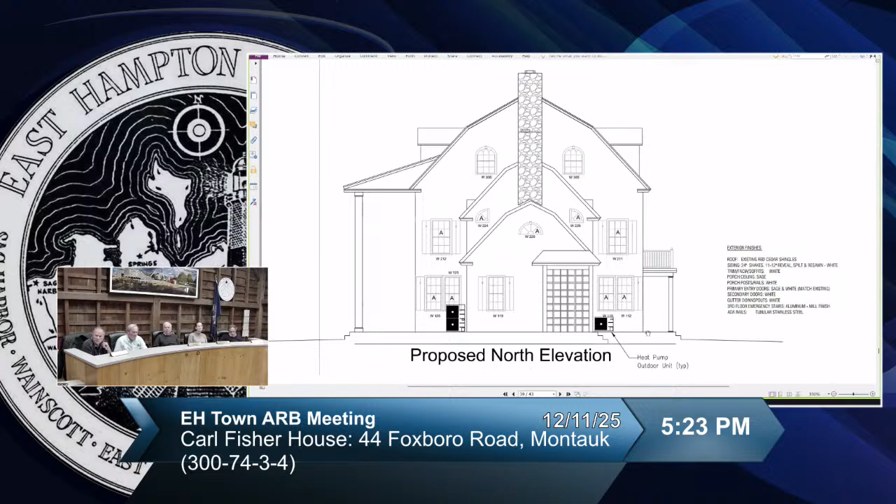Hello, board members. I'm Drew Bennett, consulting engineer. I've been hired by the town to assist in restoring the Carl Fisher House. I'd like to let you know that members of the Montauk Historical Society, board members and members, and Mia Surtek, who is the executive director, are here as well. We welcome you all.

Very, very supportive. I don't really have a presentation planned. I think Chris has done a very good job summarizing the scope of work. I'm available to answer any questions. I think it would help if we looked at some photographs that I had sent in.

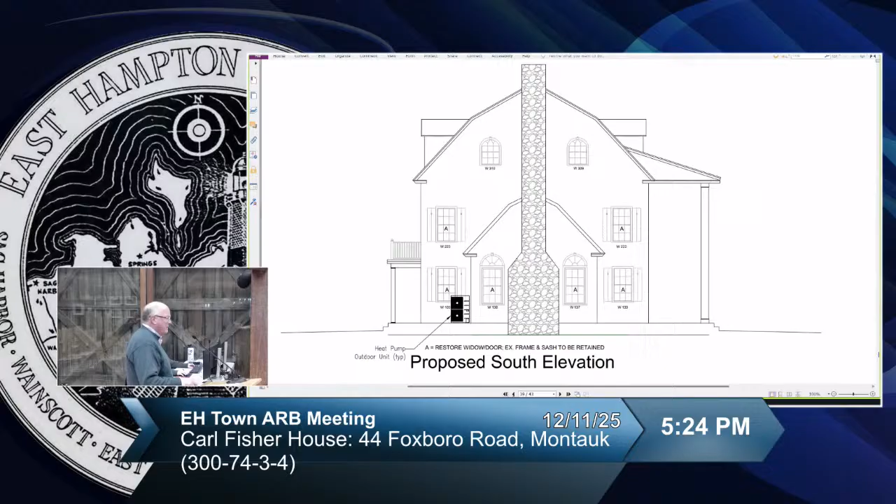You know, sometimes pictures are better than words. I'll let Mia address some of the historical records, but what I've learned is that the number of existing photographs of the house is pretty limited, and you'll see some of them in the pictures that I have here.

This is the main house, this core section. This is the west entry. Both entries lead to a main entry foyer.

So the handicap ramp we're talking about will be along this section and will connect to this flagstone terrace, which will be reconstructed. Was I correct in assuming from the drawing notes that it needed to be raised up a little bit? So that the pitched threshold doesn't become an obstacle. Okay.

The shutters, all of these windows and doors will be restored in place, including the shutters. The existing shingles, as Chris pointed out, are the same size and style, it'll just be white, as you saw in the earlier photograph. The roofing itself is in fine condition, so we're not going to touch that.

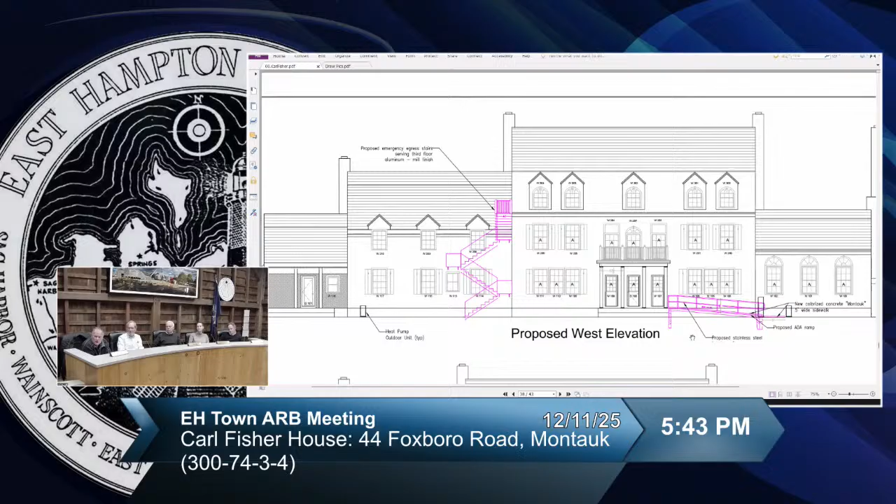I'm really reminded of the former Prince Charles, now King Charles, who called the addition to the National Gallery in London 'the carbuncle on the face of a friend.' And I'm really hesitant to see an aluminum mill finish utility fire escape stair in front of those windows, coming down the roof from that side window.

I know that earlier drawings showed a ladder fire escape, which certainly has its issues—I'm sure the fire marshal had problems with that because it's not a real approvable means of egress. So it would have been great, but here we are.

I don't know the ins and outs of the occupant load of that third floor. It's about an 1,800 square foot area, 3 bathrooms, and the rest are currently bedrooms—I guess they'd be offices. I don't know if there would be some way of decreasing the occupant load up there by using that space for other purposes, to bring the occupant load down to where you wouldn't need that second means of egress all the way down to grade.

Again, I didn't do a deep dive into chapter 12, but this is the old story of the balance between life safety and current needs and accessibility to people in wheelchairs. We have to address these things, but how we address them is, I think, key.

So a couple of questions then, just following up on that. In terms of the egress, is the reason because the house isn't sprinklered or can't be sprinklered? Or would sprinklering the third floor alleviate the need for this?

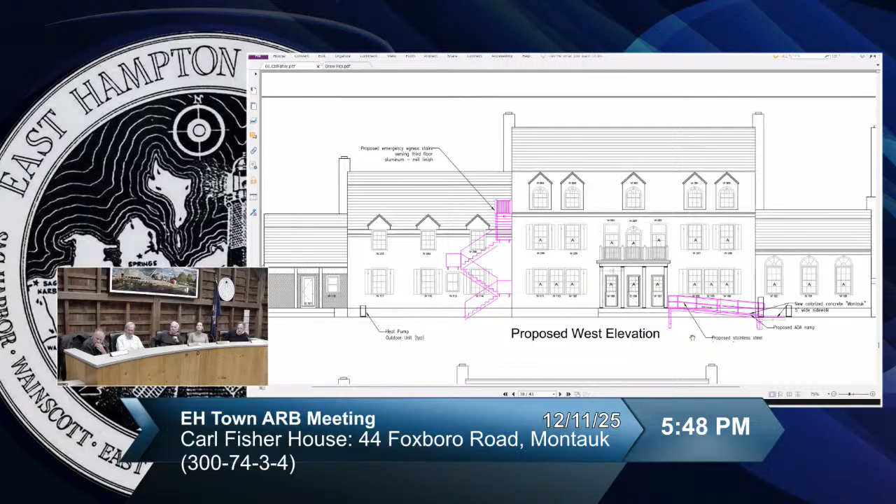I just wonder if there are parking location and siting issues that would allow you to rethink. The grade is more naturally inclined toward a ramp where it is now, and it's a much higher porch over on the other side because the grade is dropped lower. And if the accessible parking could be to the right beyond that chimney, you'd get the ramp there and you'd get the parking there.

And I don't want to be in a museum and look out at the Hyundai that's parked out there, right in the lawn—I want to look out the main view, particularly on both sides. So anyway, these are things we'll noodle about. There have been permutations similar to what you just described, so put it in your comments.

Just sort of doing due diligence as a designer, not that I'm suggesting this, but one option is to say: look, this house is a house museum, and the 1,800 square feet up there is a 30 by 60 box, which could find a home somewhere on the already cleared area, without dealing with the grade challenges. You'd have an incredibly modern, comfortable office environment and avoid the third floor egress issues. You'd lose the view for those offices, which would be a shame for the people working there because it's a real bonus.